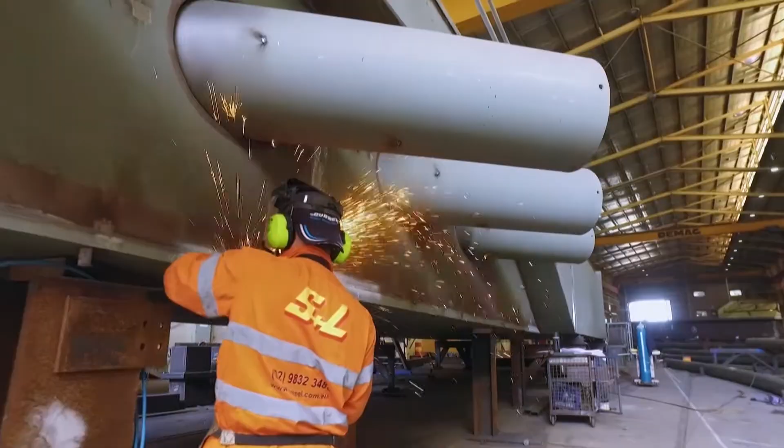In Sydney, Australia, an industrial army is called into action. No one has ever embarked on the scale of what we're doing here. Deep out of sight, beneath the harbour city, a battle unfolds. There's constant problem solving. Every day there's new problems, there's new issues. Battalions of engineers pit giant machines against rock and mud

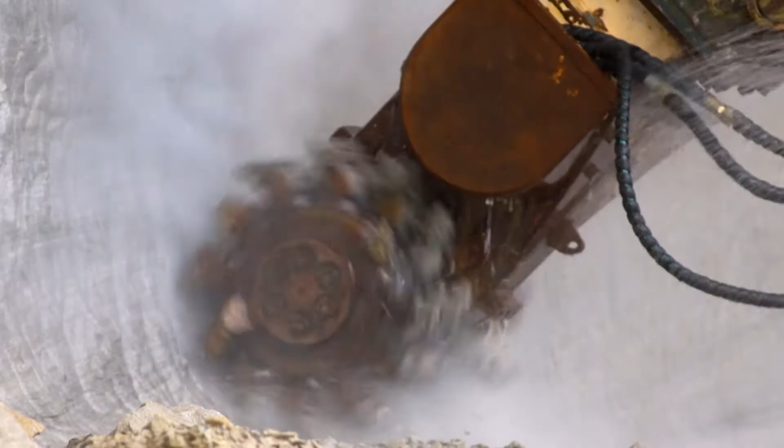to drive a new metro system through the beating heart of the city. We have to get there, there's no other way. The stakes are high and the clock is ticking. You've got to take every bit of luck you can get, don't you, in this game? This is by far and away the biggest public transport project in Australia's history.

If I'm honest, I probably didn't quite know what I was getting myself into. Got the problem?

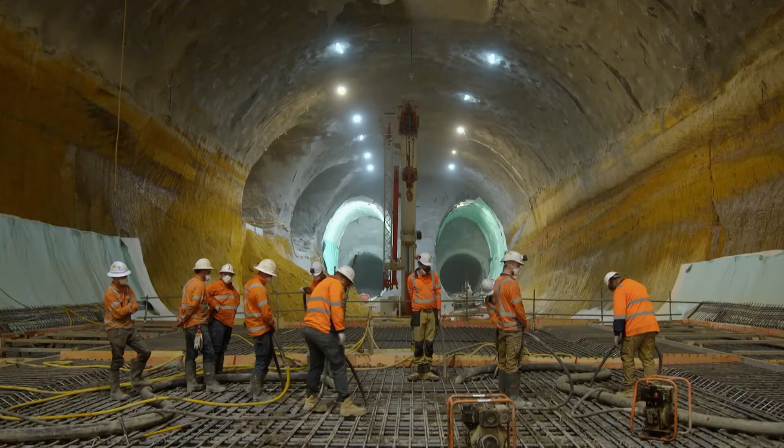Under the heart of Sydney, construction of the city's massive new metro forges ahead against the clock. 40,000 workers battle to create a $50 billion game changer to tackle the city's traffic nightmare. When it's complete, this new driverless railway will have dozens of new stations, more than 150 kilometres of track, and create a giant loop around Sydney.

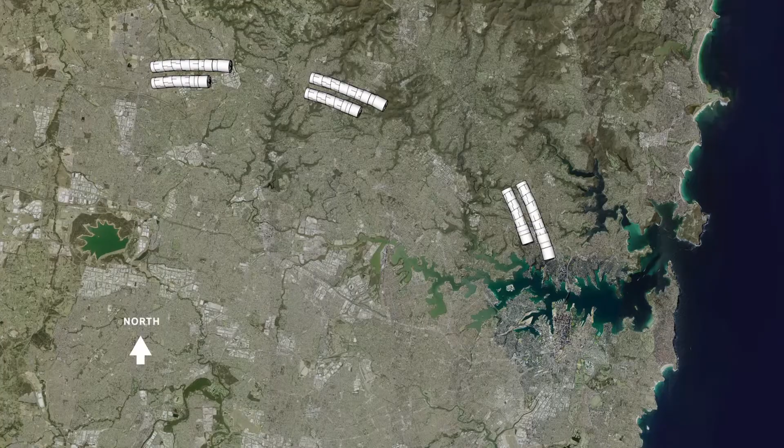8 monster hard rock tunnel boring machines, or TBMs, are digging more than 60 kilometres of tunnels beneath the city, beneath towering skyscrapers, and to the edge of one of the world's largest harbours. And now, the 9th tunnel boring machine, known as Kathleen, is about to embark on the most dangerous mission of them all, digging under Sydney Harbour.

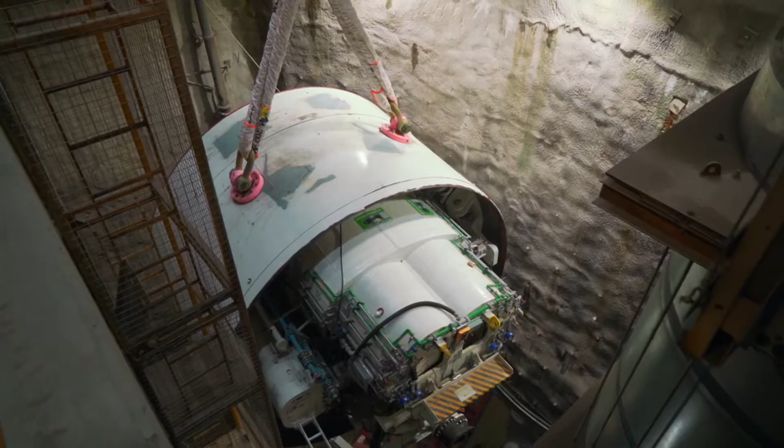At the Barangaroo site, months of planning have paid off. Kathleen's giant pieces have been transported halfway across the world, across the harbour, and across a busy road, carefully lowered down a shaft to be reassembled in her launching cavern 35 metres underground. Kathleen is now ready to go to work.

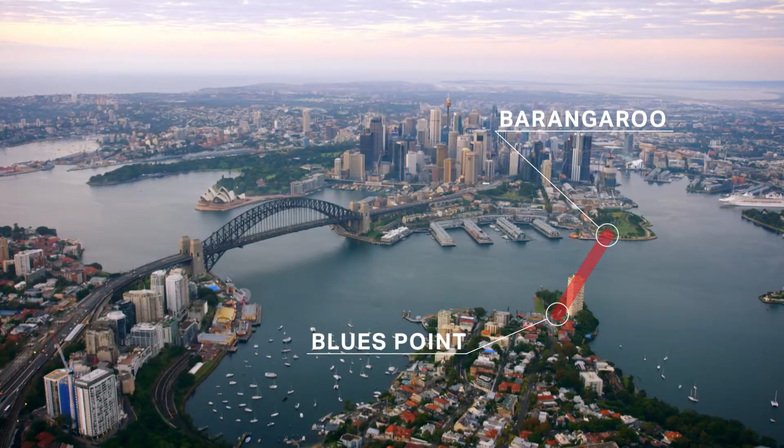Her mission? To bore an 884-metre-long tunnel deep beneath Sydney Harbour itself, twice. Not only will Kathleen's team be working almost 50 metres under the surface, they'll be operating in challenging geological conditions. Instead of friendly Sydney sandstone, they face soft mud and clay sediments, potentially shifting, unstable, and prone to collapse.

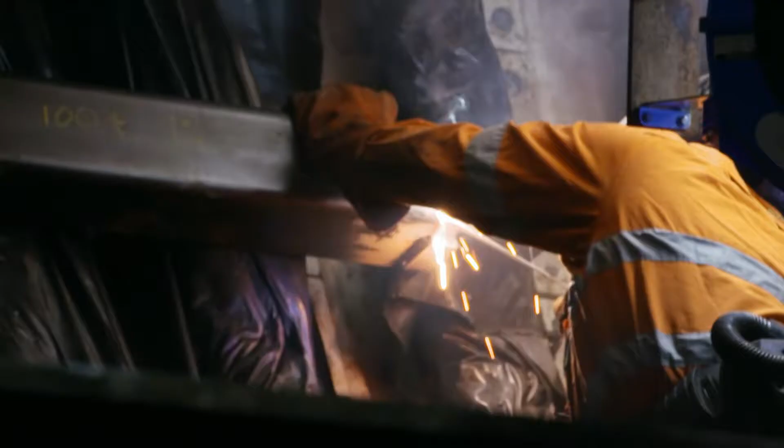Despite the dangers ahead, Kathleen's team is fired up. Her operators, Daniel Hill, known as Red Dog, and Adam Griffith, known as Griffo, are ready to go.

It's pretty much where the magic happens. Yep, we steer the ship from, so... Yeah, this is the business end. Yeah, steering wheel and your pressures off your screens, which you can see what you're doing. Might put more pressure on the bottom to go up than on the top, and more pressure on the left than the right to go right. And the panic button? There actually is a panic button. Right here, panic button. Yeah, that's when you're well and truly stuffed.

Red Dog jokes, but the refuge chamber is serious business. If something happens behind you on the machine, because you do not have an exit point, this is where we'll be ending up. The biggest thing is mainly a fire behind you. So this protects you, like the smoke, because if there's obviously smoke, you can't breathe, and you're in too far. Again, you can stay in here for 36 hours.

Kathleen has been specially designed for the bottom of Sydney Harbour and is known as a slurry TBM. Her front end is highly pressurised to stop mud and water from flooding in. Without it, the dig would be impossible. But working with high-pressure machinery deep underground is an extremely risky task.

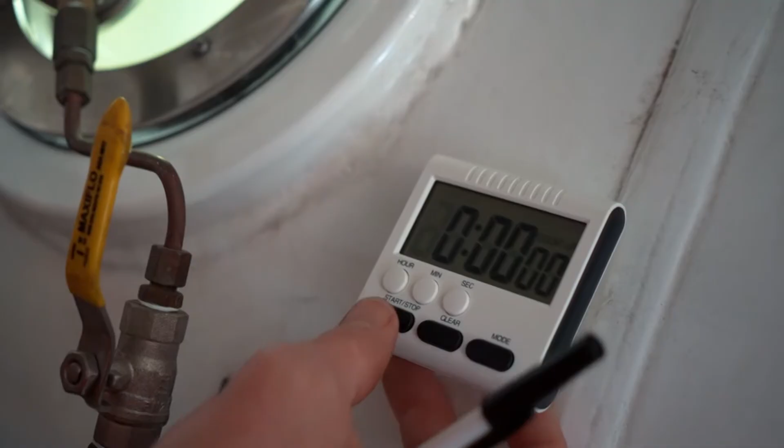Okay, I've got a thumbs up. We're about to start compression. Ready to go? Des Walters will carefully monitor the increase in pressure, or compression, to ensure Jamie and Vincent have time to equalize pressure in their ears. If they can't equalize as the pressure builds, their eardrums could burst.

Jamie is having problems - she has pain in her ears and sinuses. But they press on, and Jamie begins to get the hang of it. All good? Good, Jamie. That's the worst part over, mate.

20 metres. Once we get down to about 30 metres, we'll notice two things happen. The first is their voice will change, because the air is so much denser it doesn't resonate the vocal cords properly. You hear the laughter because they're just at 30 metres - they've just started to get the first signs of nitrogen narcosis, which is really just intoxication, the same as alcohol. She started right on the mark, right on 30 metres - she started to cackle. They're starting to feel pretty happy.

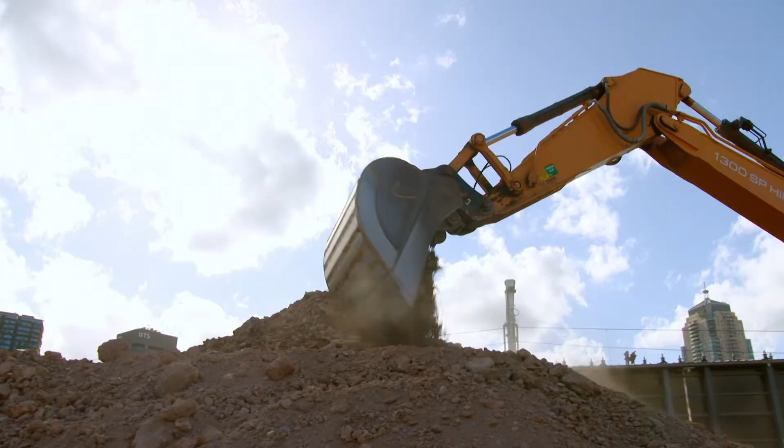Right in the middle of Australia's busiest rail hub, Central Station, Construction Director James Pearce and his team have started excavating the new metro station. But now they run into trouble - in the dead centre of their dig, they discover uncharted graves, some with human remains. So we've dug up some things, we've brought in a team of archaeologists, and we're now stopped in the area. Unfortunately we've got to quarantine it, hand it over to the archaeologists, and hopefully get it back pretty soon.

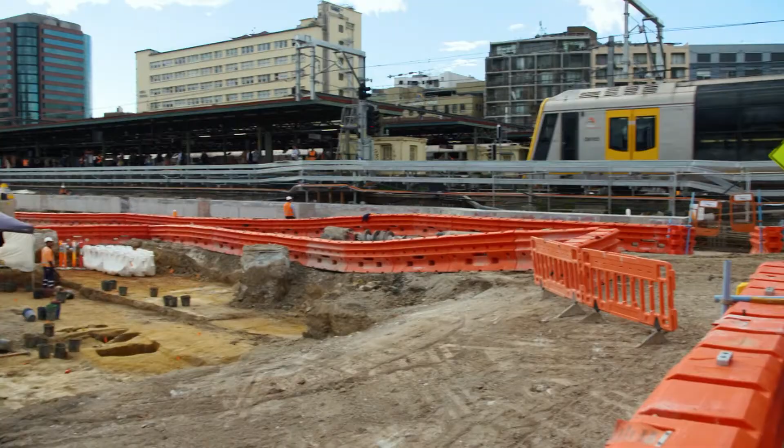Fingers crossed - it's a major setback. James stops nearly all work on this part of the site while archaeologist Ian Stewart and his team excavate the graves. We're acutely aware of the time pressures, and we're trying to do this as efficiently as we can, but obviously this has really delayed their project.

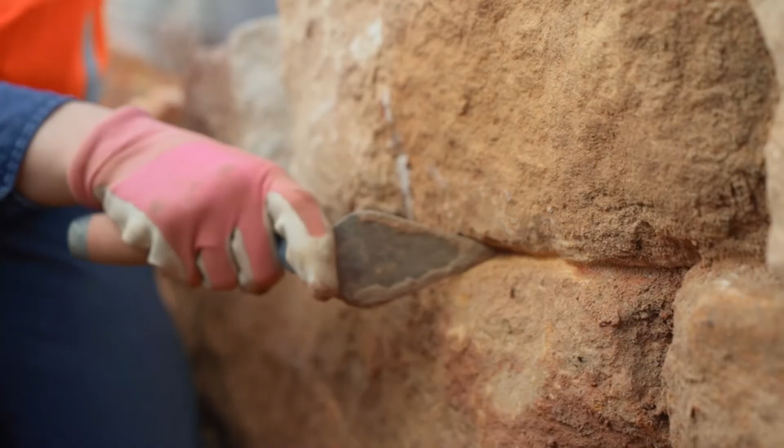Adele Zubritska and Natalia Hunt are sympathetic to James and his team, but until the graves are excavated and any bodies exhumed, archaeological trowels take precedence over the metro's shovels. We are excavating in a very old area of Sydney. Although a new railway network is very important, it's also important to record and respect our history. There might still be people in Sydney related to these people, so there's a real attachment, and it says a lot about Sydney's history.

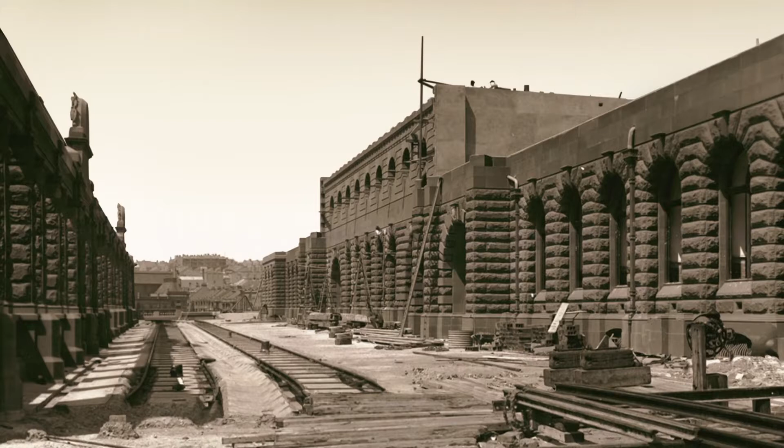The first railway station on this site was opened in 1855. Next door was a cemetery, consecrated in 1820. When construction of the new, much larger station began in 1901, the cemetery had to go.

Relatives were given 2 months to have their loved ones' remains removed. It was a ramshackle process. They didn't do a perfect job, let's put it like that, because if they did, we wouldn't be finding any bones at all. Some skeletons were crammed 10 to a coffin before being relocated to other cemeteries across Sydney. You can imagine that sometimes they might have grabbed only the largest bones that were visible, so we're here to collect what they left behind.

In all, about 30,000 graves were exhumed at the start of last century. Some of them may have been missed, some people might have gotten a little bit lazy, some people might have decided that taking half of the body was as good as taking the whole body. During the excavation...

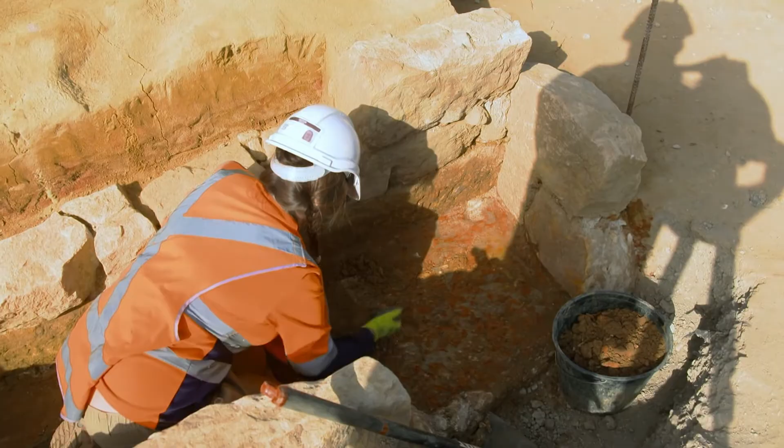160-year-old remains are unearthed. The grave is marked with a metal plaque: Joseph Thompson. Local historians track down Penny Russell, his great-great-great-granddaughter. Born in 1779, he died in 1858 in his 80th year. As they always kindly say, he didn't quite make it to 80.

Penny meets with the Sydney Metro team and members of a historical society. They need to decide what will now be done with the remains. I'm not too fussed in some ways about what happens to the bones, as long as they're treated with some suitable level of respect and care, and they're returned to the earth in something as close as possible to what his family would have wished at the time.

At Martin Place, senior project manager Will Freelander and his team are making far better progress. They've demolished 2 towers, but now obstacles buried beneath their feet are the next challenge. Not graves, but tunnels - a maze of tunnels. 2 existing railway lines that feed the eastern suburbs of Sydney, 2 new metro tunnels, and a pedestrian tunnel, all intersecting right beneath this planned 30-storey building.

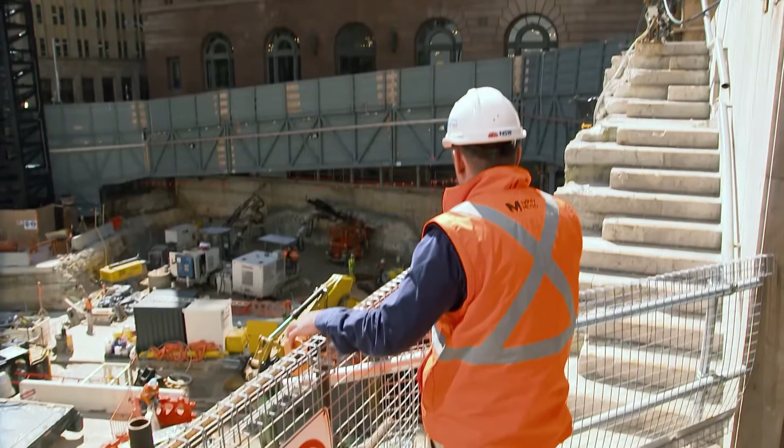It's Will's job to install huge foundation pillars to support the new tower, but there's precious little space to put them. It was a really difficult operation for the designers to come up with the location for these piles with the amount of things we're trying to dodge here, both our station that we're building and those eastern suburbs lines. So we come within 2 metres of the existing eastern suburbs rail lines, and we actually come within 500 mil of the tunnels that we're constructing at the moment down there.

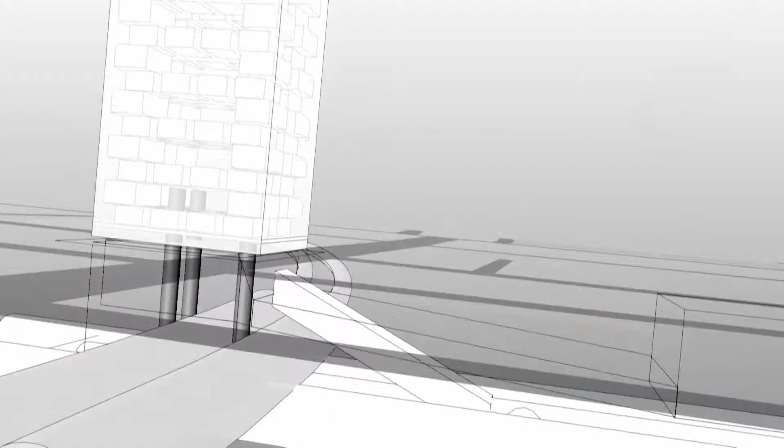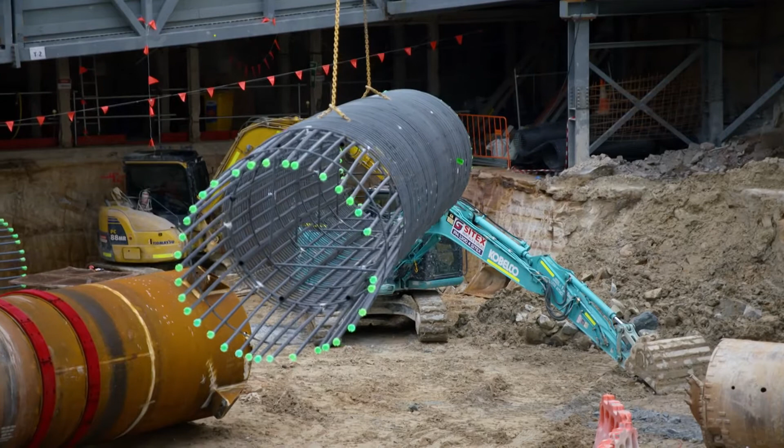But it's about to get even more risky. The pillars need to bear the weight of the new tower, but they can't put pressure on any of the tunnels below. So Will's team needs to construct specialised foundation pillars to support the building. You can see behind me one of the steel reinforcement cages being lifted for the deep foundations we're constructing here. So the cage there is one of several that will be installed in that single pile, in addition to the steel reinforcement. And then we have enormous steel plunge columns, which are solid steel members that are actually coming to site in their full length.

A super long and strong plunge column forms the spine of each massive pillar. Each column is lowered into enormous steel tubes bored into the ground. The plunge column will then be encased in reinforced steel and finally concrete. All the load from the building will go down into the base of those piles, rather than, as the building sees side load from wind, it won't be imposed on those rail tunnels that we're spanning over the top of.

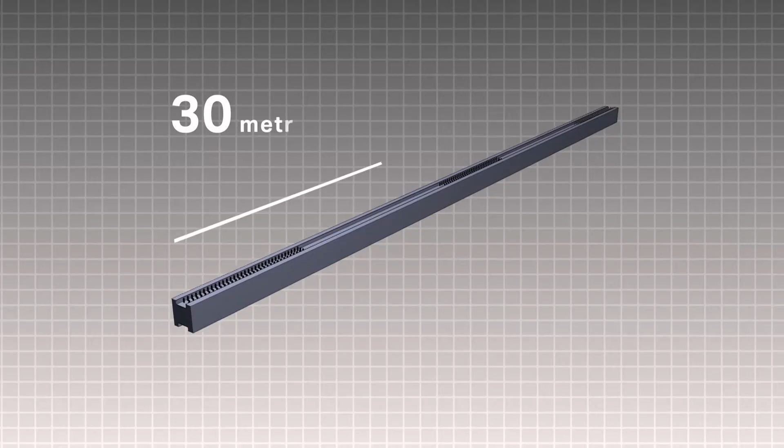Just getting the plunge columns onto the site right in the middle of central Sydney is a challenge, and one is arriving tonight. It's 30 metres long and weighs 56 tonnes. So Will has called in one of the most powerful cranes in Australia. That tower crane is basically the only piece of equipment able to lift those huge columns off the street, get them down into the site, and it'll be used to stand the column from the horizontal position, lift it vertically, and then lower it down into the excavation.

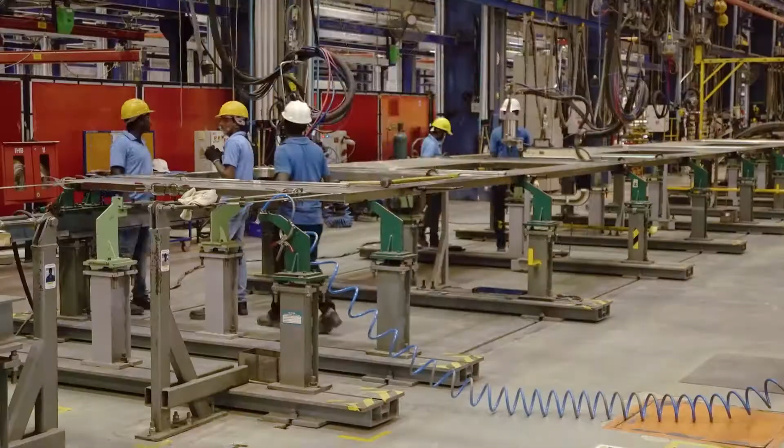It's full steam ahead for the construction and assembly of the new driverless metro trains. It's a tremendous opportunity for us to provide Sydney's first automated train. But Jim Morris knows the deadline is approaching fast, and there's a lot to do before these trains can get on the tracks. Sydney Metro is 22 train sets, with each train set having 6 carriages. You have 3 different types of carriages: the driving trailer car, a motor car with pantograph, and a motor car itself.

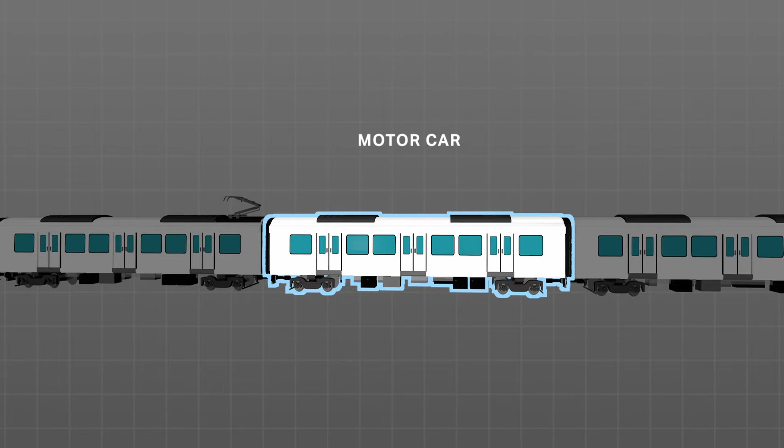550 people work in this factory, but they'll all need to keep up the pace to finish the 132 carriages in time. We have got a capacity now ramped up to 20 cars per month. So every 1.5 days, a car moves from one workstation to the other.

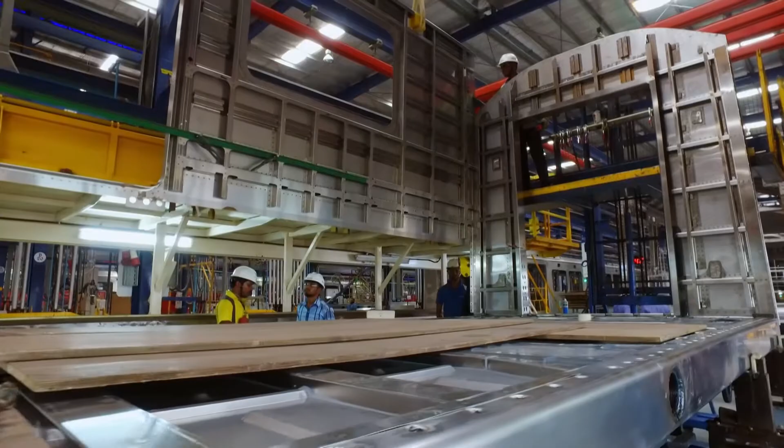The process begins with the car body shell construction. We receive individual piece parts which are welded together into sub-assemblies that form the underframe, the sidewall, the roof, the end walls, which is the car body.

The next step is the all-important high-pressure water test. We seal all the openings of the train to be able to test it and make sure it's watertight.

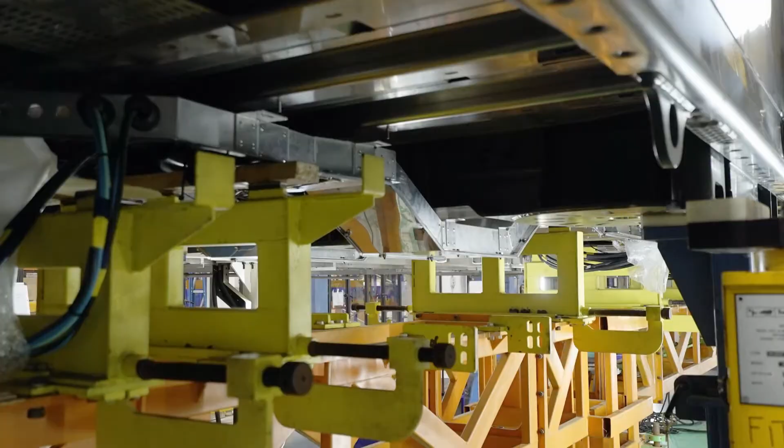Then we also do all the electrical installations, all the running of all the cabling, all the electrical equipment that's installed above and below the carriage itself.

It moves from station to station progressively, and once the car is completed, you have the integration of the car with the bogie. The bogie is basically the assembly of the bogie frame with the wheels, axles, and brake discs. Then it moves into testing to make sure we take the bugs out of the system before the trains are delivered to Sydney.

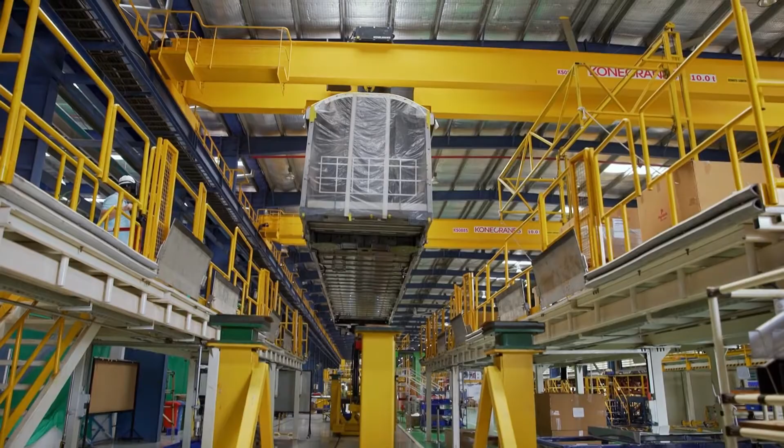With only a few months to go, the team now works in 3 shifts over 24 hours a day to make their deadline.

After midnight, with the roads almost empty, a giant steel column heads towards the city centre. The first 59 kilometres are easy enough. It's the last kilometre that worries Senior Project Manager Will Freelander.

It's heading here to Martin Place. This is one of the tighter corners we've got to navigate, so the beam's going to come off Bridge Street and up the street here before turning and going up towards site.

The delivery has only been approved if it doesn't come within a metre of any building. We try to allow a metre minimum clearance as we come around the corners. It's not much when you consider we may also have to navigate past parked cars. We plan on not touching any building or structure as we come in.

The first corner is a tight left. The chains holding the beam in place tighten under the strain. You can see the axles on the back of the rig steering independent to the main truck, with the operator in the back car controlling things.

One corner down, two to go. The next is another left turn, but even tighter. We've done the first side corner, just coming around one of the tightest ones now. Good to see no parked cars or extra issues we're dealing with tonight.

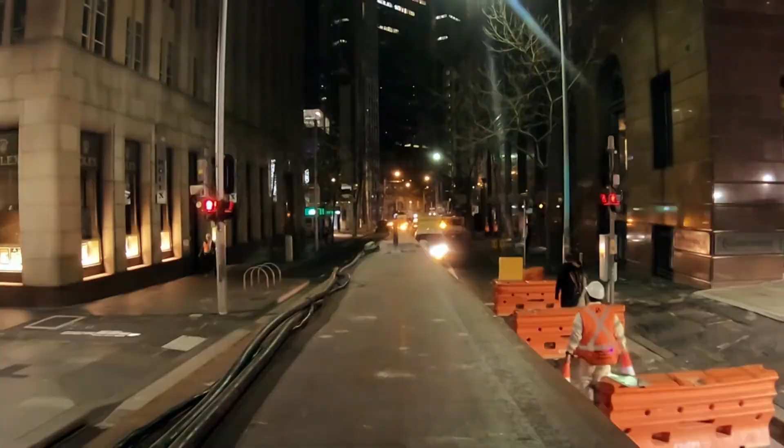The men behind the wheel are happy. Frank drove the front of the truck. Didn't get a red light down Parramatta Road. I've never done that in my life. How good's that, eh? Fergus, in the back, says: Yeah, all happy. Got here in one piece.

Ready to lift when you guys are.

Will is relieved. Nothing hit, nothing damaged. So I am a happy man. It's now 2 a.m, so I've got a couple of hours sleep before the day shift starts again and we get to start planning for the next hurdle to overcome.

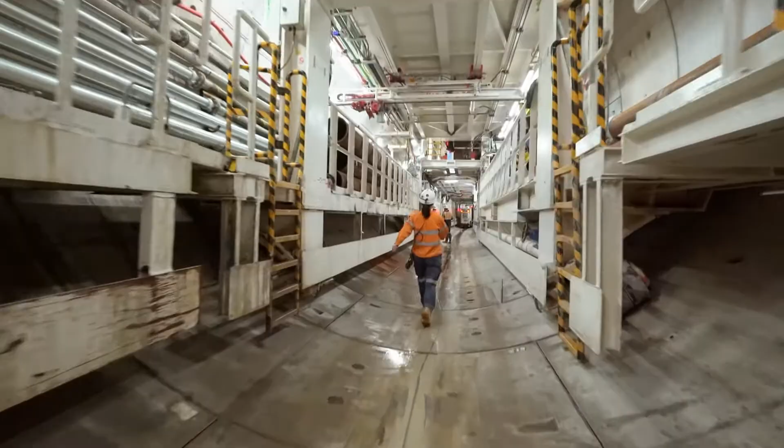First time TBM engineer Jamie Chirk is ready to take her place on the machine. She's not installing the concrete tunnel lining or operating the machine. Her job is to constantly check the tunnel is being built according to the design.

I have no experience with the TBM so far, and because this is all so new, I like to think I'll make sure I do all the right things and I'm not the reason for them to stop.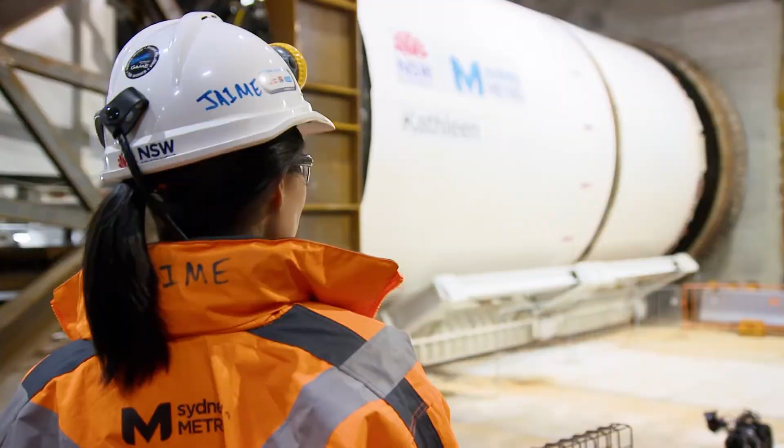She's going to be very unfamiliar with what parts move and what don't, and she'd have to be told quite clearly where she can and cannot be at certain times and whatnot. But she's a smart cookie, so she'll work it out.

There's certainly one place no one can be once the machine starts boring, and that's between the rock face and the cutter head. Red Dog does one final inspection before the pressure begins.

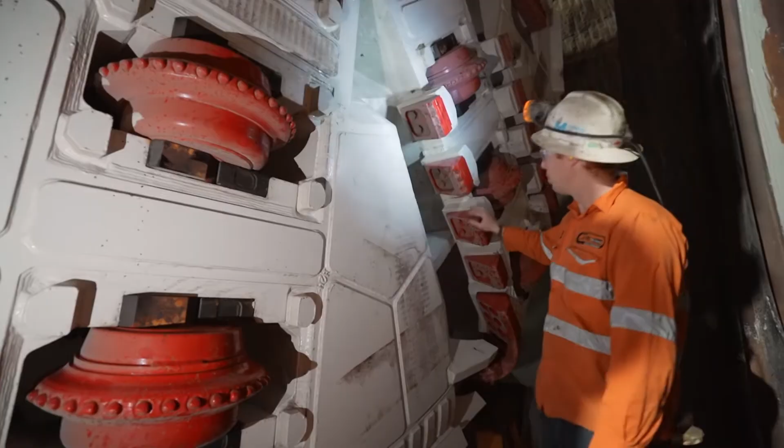To begin with, we've got solid sandstone, so these come in handy, but once we get into the softer stuff, we've got mainly all the buckets and the teeth. If we've got to come in here and change them, that's where we match the same pressure for the cutter head as it is for the water pressure coming into the machine.

When they're tunnelling deep under the ground, safety is always first, but the work they're doing requires some of the best skills needed around the world to actually bring these projects to fruition.

Kathleen is fired up. Into history she heads, deep beneath Sydney Harbour.

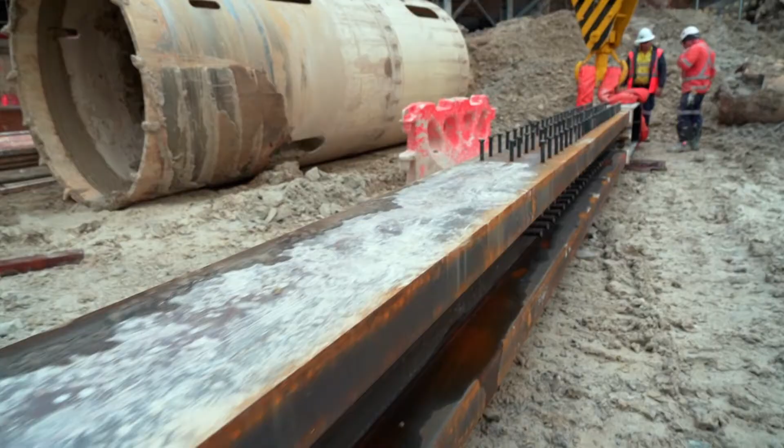Back at Martin Place, it's time for the new tower's foundation plunge columns to be installed. It's like threading the eye of a needle, where the needle is 30 metres long.

One of Australia's most powerful cranes has been brought in. Months of intense planning have gone into this operation, led by Site Superintendent Brian Marshall, who lifts the lid on the challenge ahead.

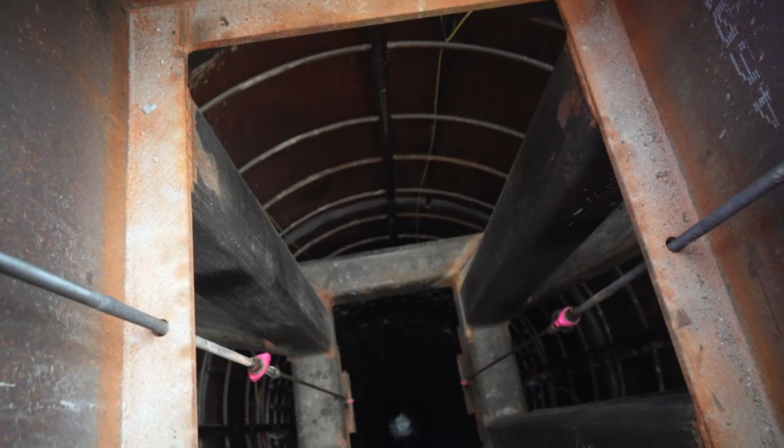Looking just inside the pile itself, we have a steel tube that runs on the outside that goes 27 metres deep. That then has a steel cage inside that protrudes out the bottom of that casing, taking the pile itself down to 40 metres deep. This is 18 months in the planning to actually get these beams in, installed and concreted in.

Brian is feeling the squeeze. Below, the new metro tunnels are being dug. One tunnelling machine is just metres from where the plunge column will end up.

The road header is cutting through here at the moment. It's cutting past this pile now, about a metre away from where we're standing, directly below us by 16 metres down. Normally you wouldn't go that close - you want to stay as far away from the piles of a building, especially a high-rise building, as you can.

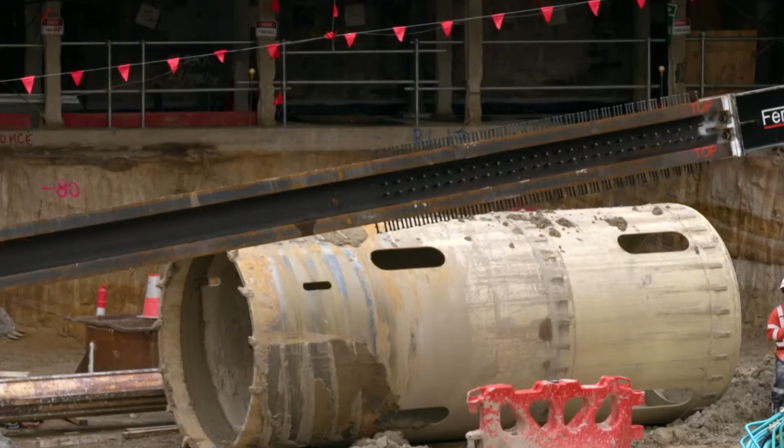So we're just about to lift the plunge column upright and then place it into the hole. The first plunge column is raised, taking great care that the 30 metres of steel doesn't begin to rotate or swing. The beam is designed to be lifted in this direction - if we lift it out of the right direction, it could actually put a bend in the beam, which we don't want.

Brian is on tenterhooks. It should take around 15 minutes for the beam to be lifted up and placed into position in the subframe that holds it up there. So far, so good.

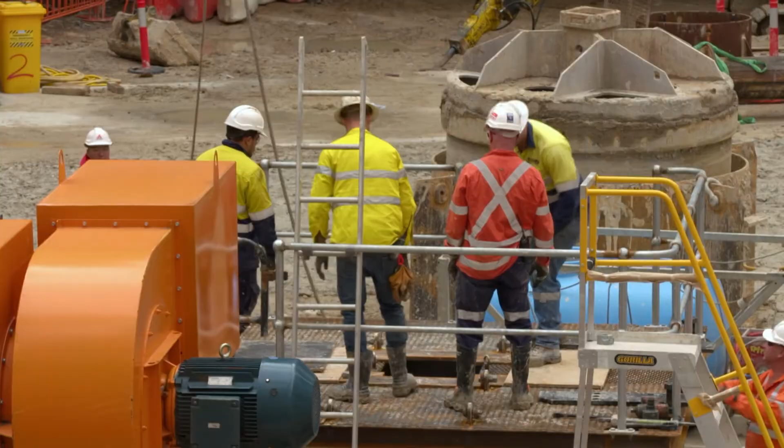Next, before the column descends into its hole, every last bit of dirt and grime must be removed. The concrete must later set around it perfectly snug, like a second skin. Corrosion would be catastrophic.

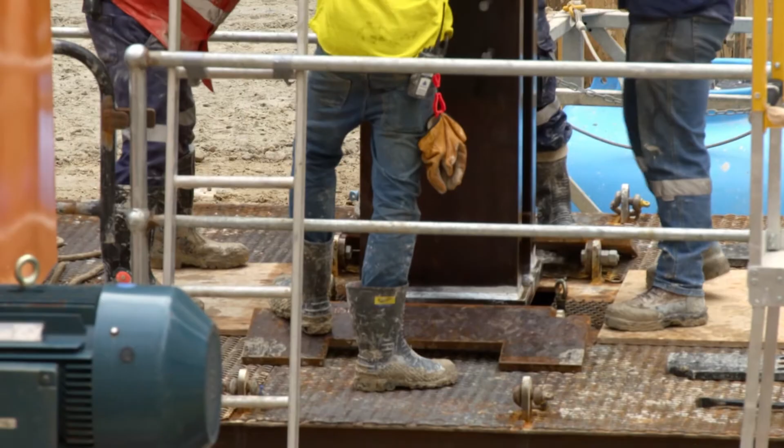Time to thread the needle. The first few metres are critical - everything must be perfectly aligned. Any twisting or buckling, and it's back to the drawing board.

The plunge column drops into place, narrowly avoiding the maze of tunnels below. Now they're putting in the locking pins that actually locate the beam in the right position. We don't want it to be off plumb at all, because if it's out by 20 millimetres at this point, if you go up 30 stories, that would be magnified into around half a metre off at the top.

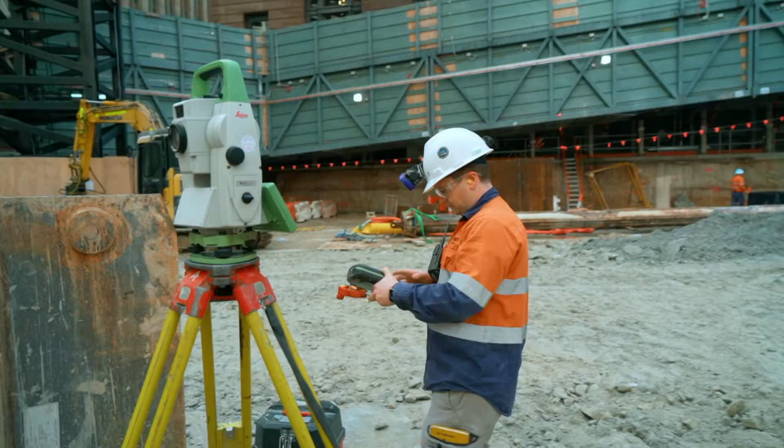Some final adjustments, and it's there. Touchdown. It's in location. Now all we need is a surveyor to come and tell us that it's in the exact location that we need.

The surveyor gives the plunge column the all clear. Great job in getting it in there. Now we're going to lock it off into position and prep it for the concrete works. Job well done by the boys.

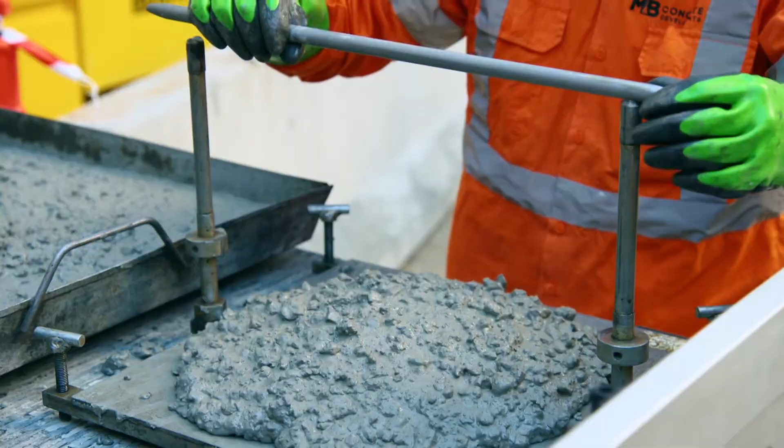But Brian is not finished yet. The concrete works first needs to pass the slump test. A set amount of concrete is dropped, and the amount of slump or spread is measured. This checks that the concrete is exactly the right viscosity to fill the entire hole, with no air gaps that could weaken the foundation.

The concrete gets the thumbs up and is poured down into the hole to secure the plunge column in place. When the concrete is set, it's tested again.

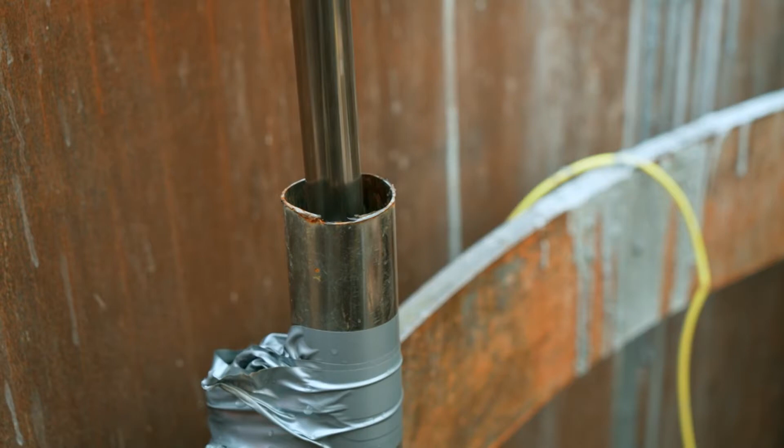There's a probe in this tube here and a probe in the other one over there. What it does is send a signal from that probe to this probe. If it's good consistent concrete, the signal should take a certain amount of time to get from one to the other. The little yellow one measures the temperature of the concrete, so we can see what temperature it reaches over the 7 days between being poured and when we do the sonic logging testing.

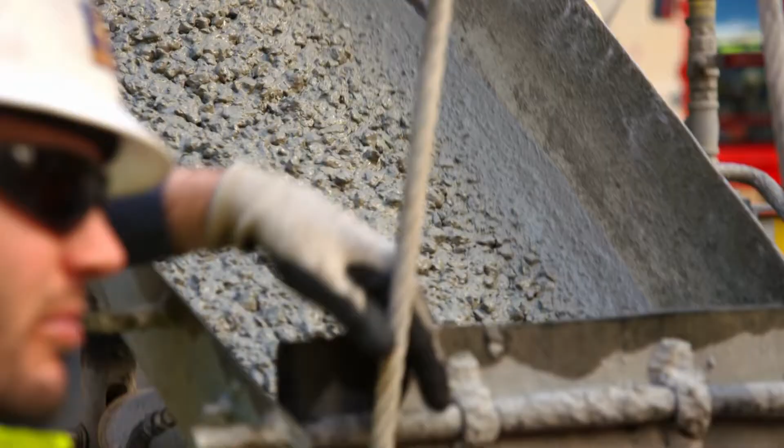What happens if the concrete fails the sonic logging test? That's not going to happen. You'd have to redesign the building just to reposition one of these piles. The problem is there were only 3 locations we could put these piles in that wouldn't hit the existing or new rail tunnels we're putting in.

Luckily, the concrete passes the test, and the excavation of the massive Martin Place southern shaft goes full speed ahead.

Out in Sydney's northwest, almost all of the new metro line will run underground in twin 15-kilometre tunnels. But one section won't. West of Bella Vista, 4 kilometres of track needs to cross a floodplain. So engineers have decided the line will run above the ground, 13 metres above, along a viaduct.

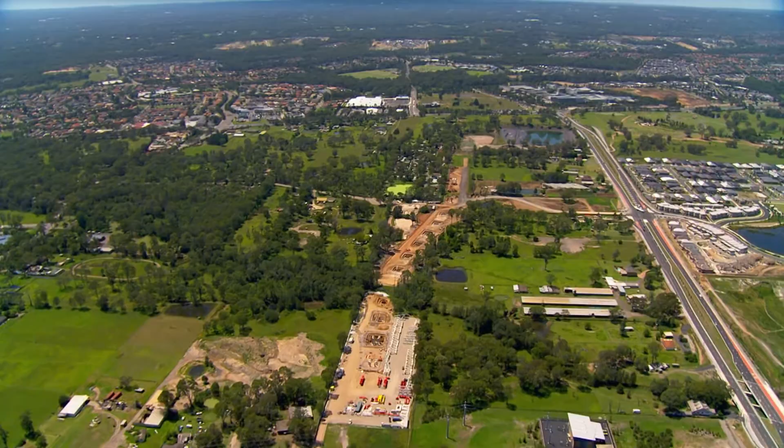This means 2 new stations will also need to be elevated. This part of the project is called SkyTrain, and most of it will be built by 2 horizontal cranes, known as launching gantries. The machines have just arrived from a massive roads project in Dubai.

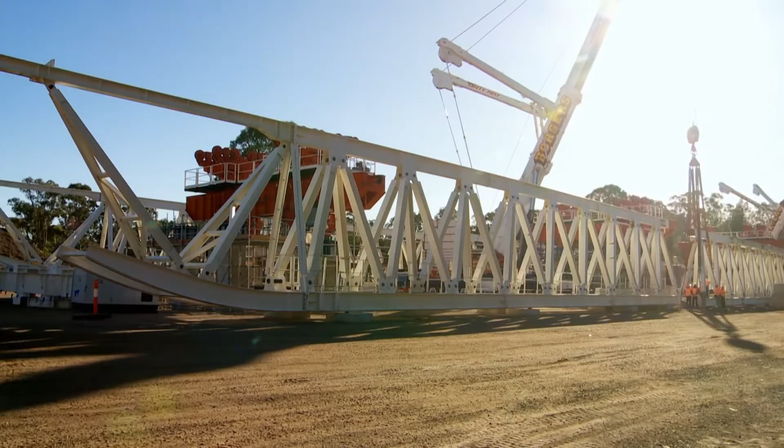There are several different types of challenges. We must be always ahead of the game, working at height, so safety has to be controlled in a very strict manner. First, the cranes have to be assembled about 20 meters above the ground, balanced on top of some of the 120 concrete piers they will move along to build the SkyTrain's deck.

We actually put up that piece and the other end piece at the same time. We are going to use 2 500-ton cranes that will work in tandem, and they will support the operation of setting the truss on the rails.

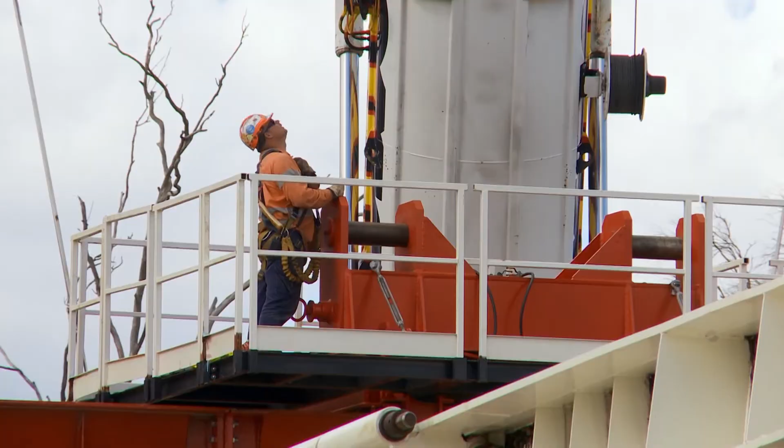Giuseppe Mafrica is responsible for this task, and he's not happy. The wind is his enemy, and it's starting to blow. One of the main factors that can affect the job is the wind. If there's too strong a wind, of course, we cannot erect. Normally, we stop if the wind is stronger than a certain limit.

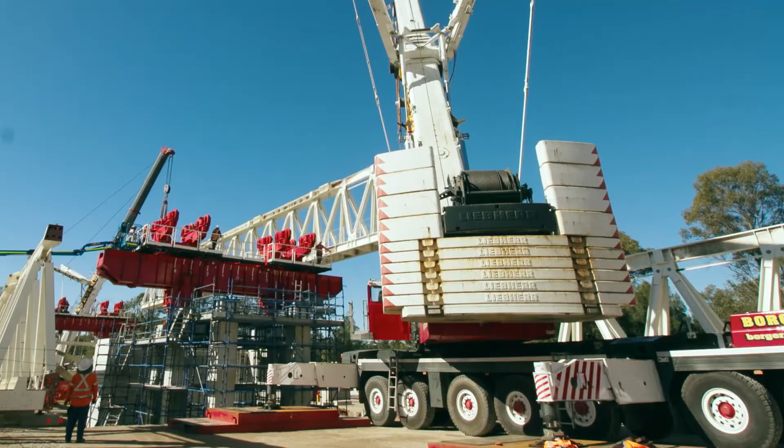For the moment, wind speed is just under the limit, and the lift gets underway. The first attempt to land one of the 6 giant trusses on top of the wheels fails. The wind is a real problem. They try again. This time, the wind drops just in time.

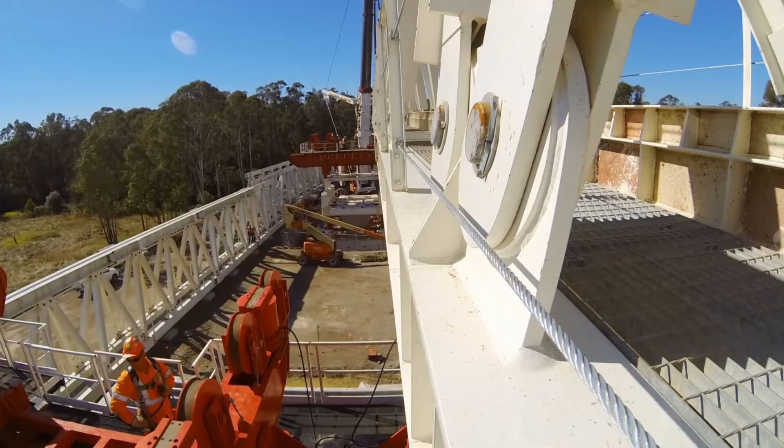And it's there. 1 down, 5 trusses to go. It gets easier. Soon, the major part of the lift is done. The remarkable thing about the gantries is their speed.

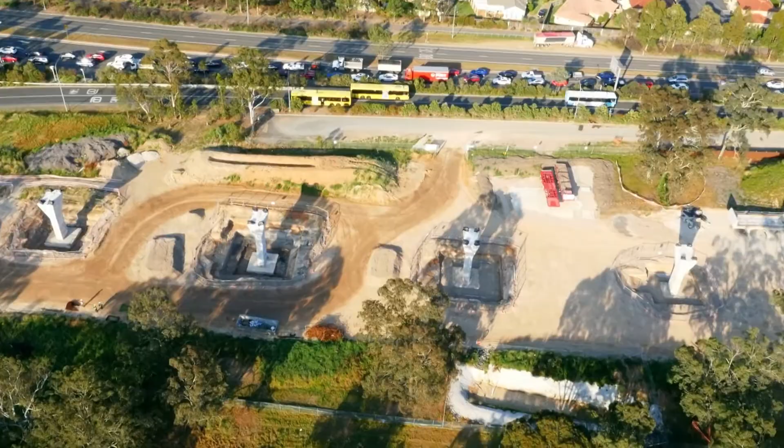Already, many of the concrete piers that will support the viaduct's deck have been installed. Temporary wheels on top of the piers will allow the crane to slide from pier to pier, using them like giant stepping stones as it moves forward.

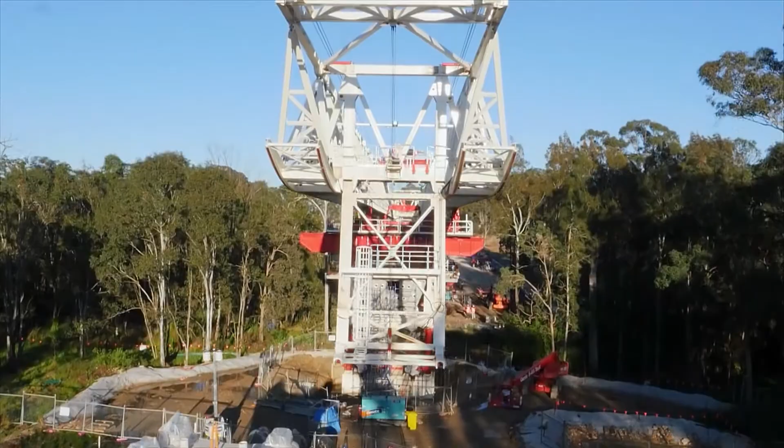It begins here, where the viaduct just starts to leave the ground. A precast segment is delivered. It weighs 90 tons. It's hoisted up by the gantry crane with ease. It's shifted over into position and slotted down securely on a temporary steel frame to hold it firmly in place.

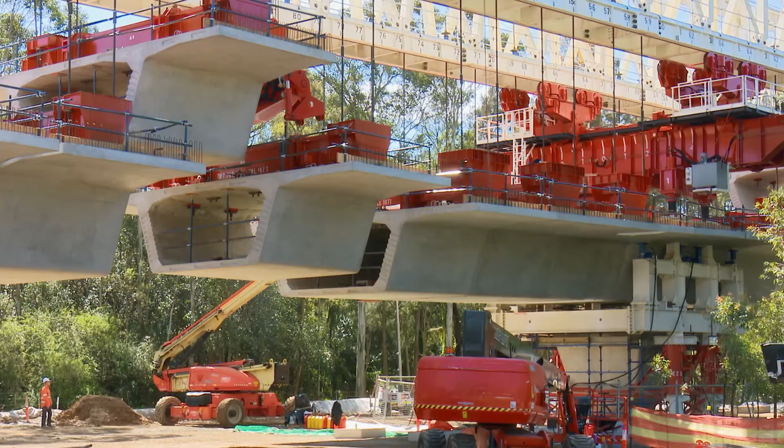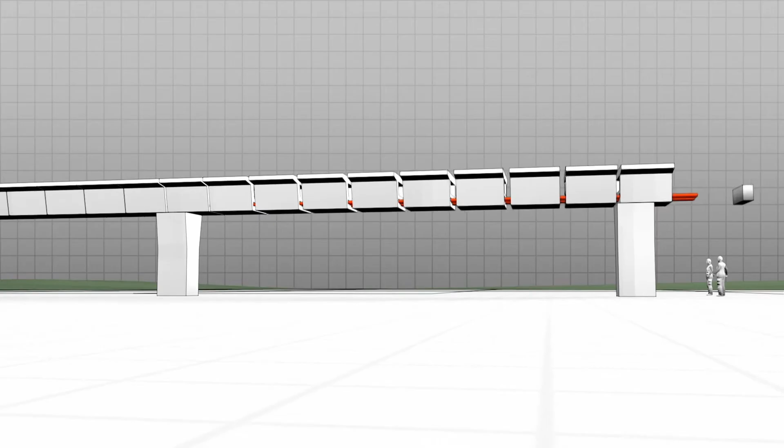One by one, the crane hoists up more segments until it's suspending 10 of them, a combined weight of almost 1,000 tons. Now comes the most critical part of the process: pulling all the segments tightly together. Steel cables are threaded through the segments, which are then tensioned tightly together, creating a concrete span as strong as if it had been poured as one piece.

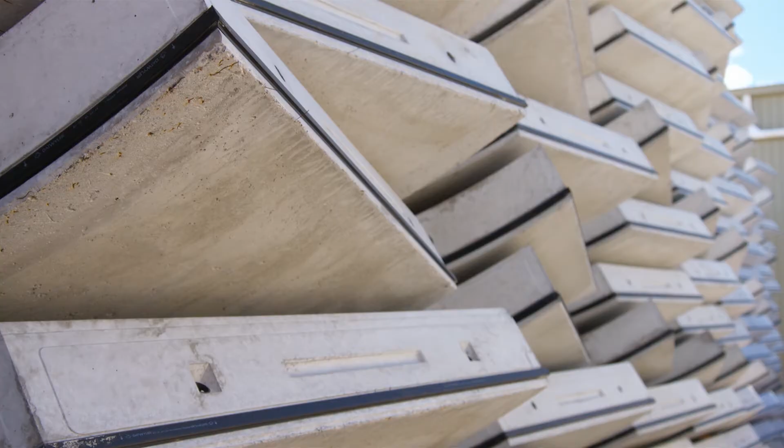Once they've launched, tunnel boring machines, or TBMs as they're known, require many thousands of concrete segments to build new metro tunnels. Each TBM needs up to 1,100 of these crescent-like pieces of concrete every week, so they can keep moving forward. To keep them fed, more than 140 people in vast concrete segment factories work around the clock to produce a segment every 6 minutes.

The largest factory is at a tunnelling site in the suburb of Marrickville, where nearly 100,000 segments will need to be made. Each weighs up to 4 tons and is designed to last at least 100 years. So high tensile steel wires and polyfibre are added into the concrete mix for extra strength.

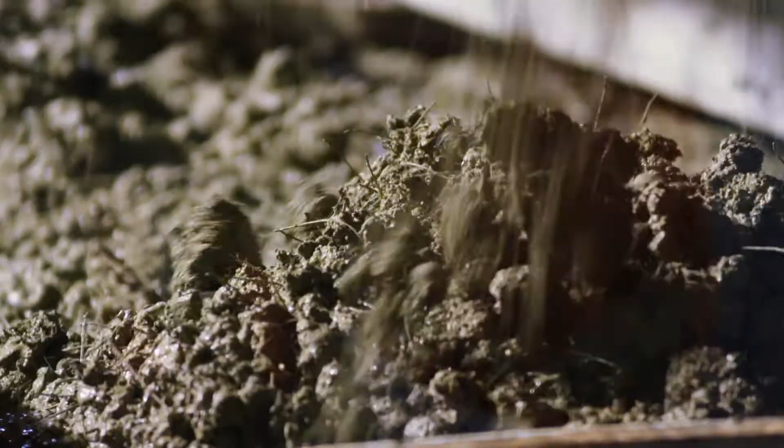Every segment has a unique barcode that tells us what type of segment it is and when it was manufactured, and that's scanned both over in the precast yard and then here, and then also on the TBM.

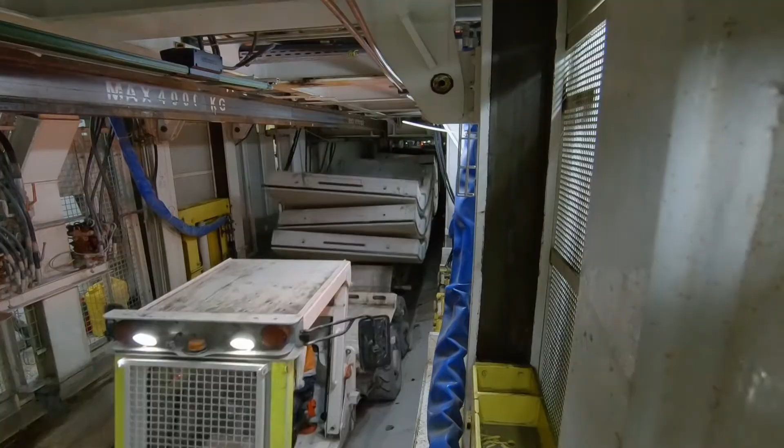Because the segments have to fit precisely, it is critical they're delivered in the correct order. Get it wrong, and the TBM grinds to a halt while the correct pieces are found and delivered underground. We have a guidance system which tells us the exact placement and the angle that the segments must be placed so that we can guide the TBM.

Each concrete ring is created by assembling 6 segments, but they are not symmetrical. Every ring is tapered, with one edge slightly shorter than the other. When the tunnel needs to run straight, the tapers alternate. But if the tunnel needs to turn, one tapered edge meets another. Aligning the tapered edges turns the tunnels.

It's important that we keep track of every segment that goes into the tunnel to ensure that the correct segment has been installed in the correct place. So we'll load this TSB.

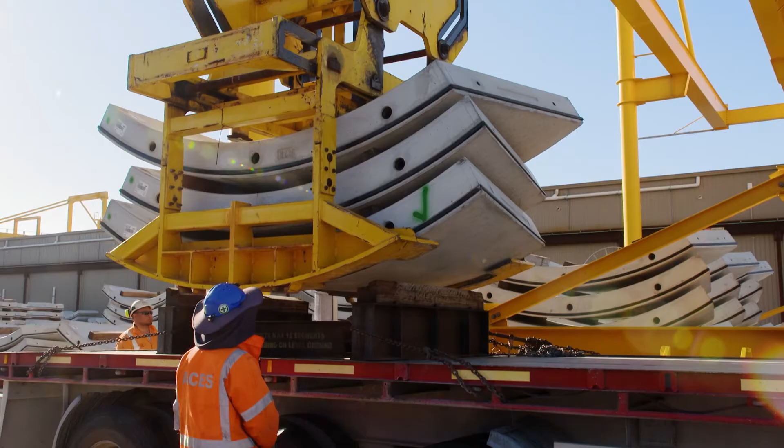Not all of these segments are destined for the tunnels at Marrickville. Six at a time are loaded onto trucks and transported to other tunnel boring machine sites around Sydney. This delivery is on its way to Chatswood on the North Shore, crossing the famous Sydney Harbour Bridge, where the segments are offloaded by a crane and successfully lowered into the site.

Back at Barangaroo, the TBM Kathleen crew have been making steady progress, digging deep below the harbour. 240 metres in, 140 rings. Yeah, go along nice and smooth, making good progress. Yeah, everything's tickety-boo at the moment.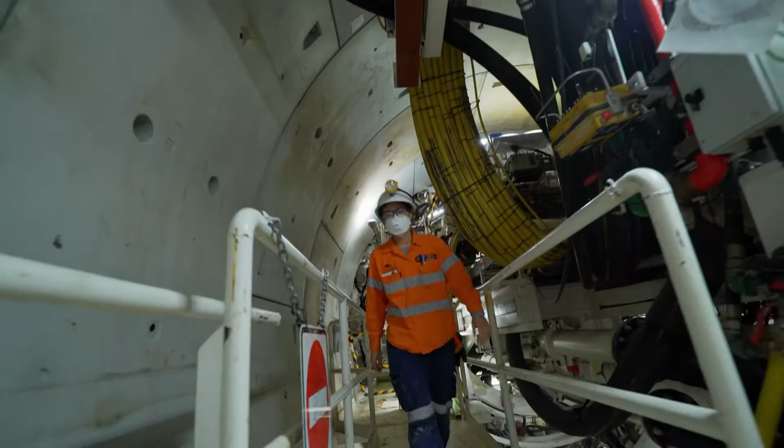Engineer Jamie Chirk, on her first TBM, has left behind any nervousness at Barangaroo. I'm quite busy actually in a shift. If I could clone myself, I'd be in 10 places at the one time. Yeah, we've been doing really well, and actually our managers were telling us how surprised everything's gone really smoothly, so very happy with that.

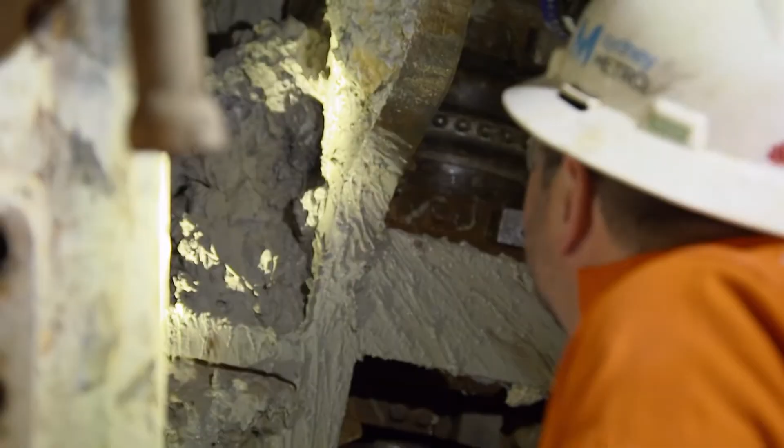But suddenly, they have to stop boring. They've hit a layer of dense clay, which is clogging up the cutter head. Thankfully, there's no water. This means they can still enter the front chambers to clear the cutters. It's fine, I'll just take it. We'll sort it out, we'll get the bentonite mixture right, we'll only get better from here.

Bentonite is what makes Kathleen different from the other tunnel boring machines. It's why this type of TBM is called a slurry machine. When the hatches are closed, the front of the TBM is pressurized, pumped full of liquid bentonite and high-pressure air. It pushes against the pressure of the mud and clay and stops it from flooding into the machine.

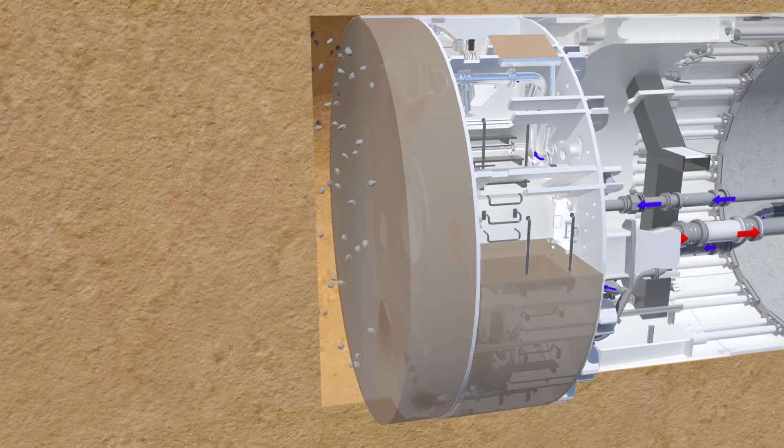The bentonite creates a slurry as it mixes with the material being excavated by the cutter head. The slurry is pumped out of the excavation chambers and travels along an ever longer pipe to reach the slurry treatment plant. Here, the excavated material, or spoil, is extracted from the slurry. The spoil is barged away. The bentonite is recycled. It's then pumped back to the TBM to be used again.

Through the sandstone and the clay, Kathleen has made great progress. But now, it's the moment of truth. The sandstone is behind her. Ahead lies the trickiest part of the harbour, the ancient river channel.

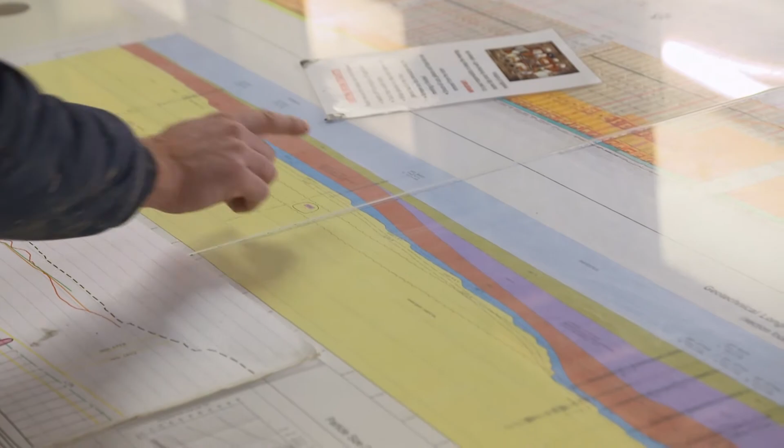So we've cut out of the sandstone, through the clays, and now we're in this band of organics, and it's 4.5 bar pressure, which is pretty high pressure. It's very, very soft, so you have to be very careful making sure the TBM is steering in the right direction. Because it is so soft, the machine has a tendency to sink. If you drop the pressure, the water would just race in at this point, absolutely race in. It's a bit of a critical time, it really is.

Non-negotiable today is be fit for duty, make sure you're not fatigued, and just be careful down there, and that's it. Have a safe one.

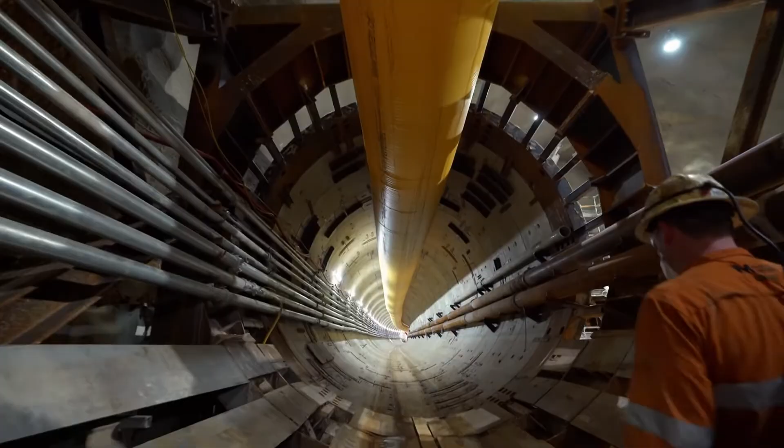Griffo only spends half of his shift on Kathleen. He splits his time between the TBM and the slurry treatment plant. I must walk 20 k's a day without any problem at all. So every day it's a little bit further when you're coming in.

At the plant, Griffo takes a look at just what they're boring through now they've left the sandstone behind. It's far less solid and far less stable. It's almost like soil, lots of seashells, lots of broken down plant matter. Chemistry is a little bit different, so it's a bit harder for this plant to deal with it.

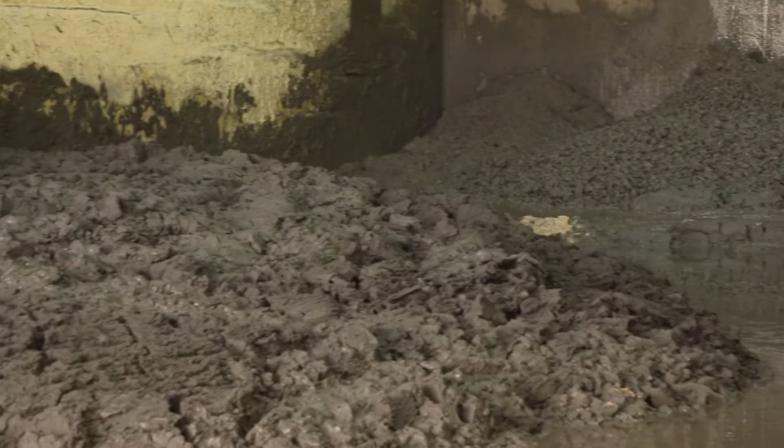Tunnel boring machine Kathleen is now mired in this sludge. It is ahead of them, behind them, beneath them, and above them, pressing down. It's an anxious time. Yeah, we're coming to almost a halfway point right under the middle. So we've got 5 bar head pressure in the bubble chamber. 5 bar is close to the maximum pressure for the best operation of the machine, pushing to the limit.

Red Dog says the high pressure chambers at the front are now too dangerous to enter. Because there's so much pressure on the head, we can't actually go in the front cutter head at the moment. Even under hyperbarics, it's a little bit too high. It's just changing that quickly, the material.

But suddenly, there may be no choice. Something has gone wrong up front inside the chamber. A piece of the giant cutter head has come loose.

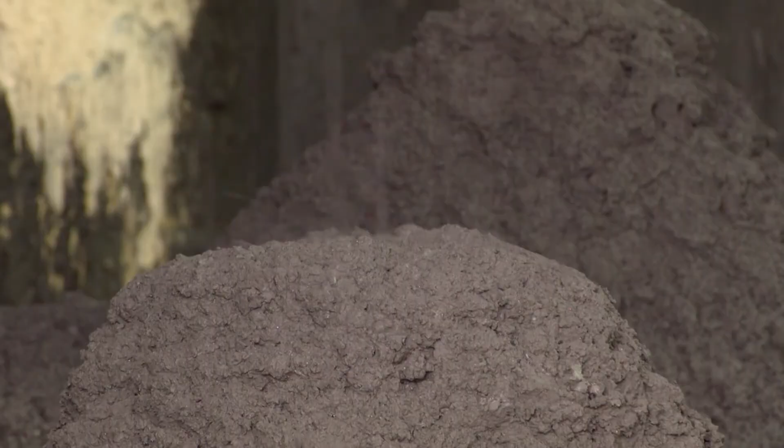It's shown up in the slurry treatment plant. Just making a joke to the guys, it's like, it's Friday the 13th, so let's see what happens. And literally, the foreman walks in and brings us this wedge and tells us it's what he just picked up from the slurry treatment plant.

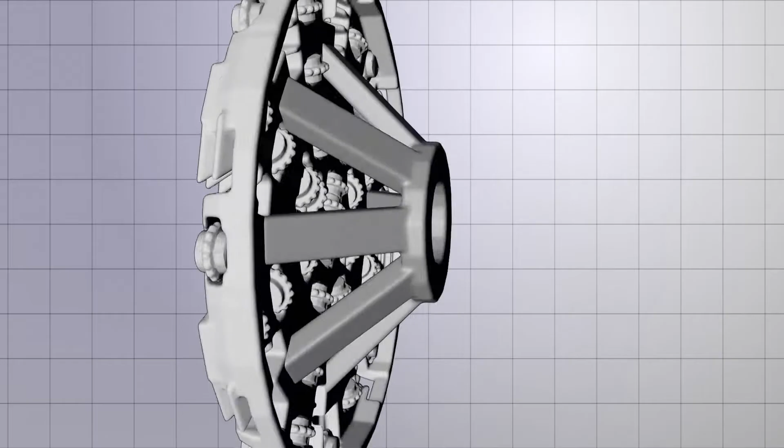We then made the decision to immediately stop the tunnel boring machine and to prepare for an intervention. The wedge secures the cutter wheels in place. It needs to be replaced, otherwise the cutter wheels risk coming loose and causing major damage. It's like a 400-kilo piece of steel that falls into the cutter head. It gets turned around with the cutter head, and it can create a fair amount of damage, destruction.

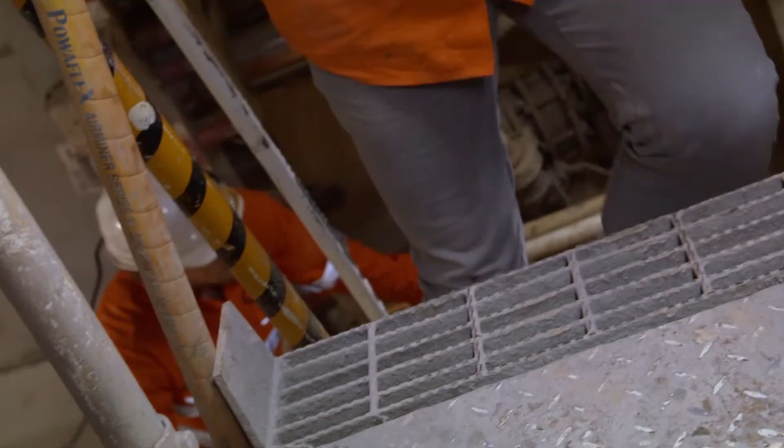They have less than 60 minutes to complete the job, or else they will have to spend hours in decompression to reduce the risk of the bends. Okay, here we go. It's 1404.

Vincent and Michele enter the hyperbaric chamber. They wait while the pressure is increased to match the pressure inside the cutter head. Once equalized, they get to work. Michele heads into the cutter head, his voice already affected by the pressure. Vincent remains in the bubble chamber. Michele brings a camera.

This is very rare footage. Few people have ever seen the inside of a cutter head while it's in the heart of the clay and mud. Michele starts checking the cutter wheels one by one. I need some water, mate. He's looking for the four double cutters.

This is good. The cutter head is more than 7 meters high, and everything is covered in sludge. 1, 2, 3, 4, okay. Vincent controls the flow of a hose from inside the adjoining chamber. Give me back the water. All right, good. Suddenly, Michele is hit by the water spray.

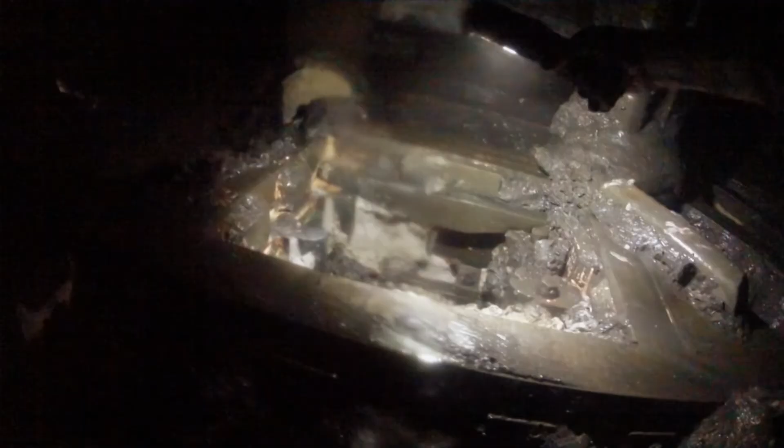Soon, they have only 12 minutes left. Michele and Vincent need to get to the decompression chamber soon. The problem is here, we have the wedges here. Yeah, I found it. It's number 5 and 7. 5 and 7 is missing here.

And there's more good news, the cutter is still here. The cutter wheel hasn't been damaged, just the wedge, the rest is okay. Mission accomplished. Okay, I'm coming up.

Another team will now enter through the second hyperbaric chamber to replace the missing wedge. And after almost 2 hours of decompression, Vincent and Michele are back. Vincent is a funny guy, and at some point he started spraying water on me while I was very concentrated finding the problem, but it's part of the job. We have this funny moment as well.

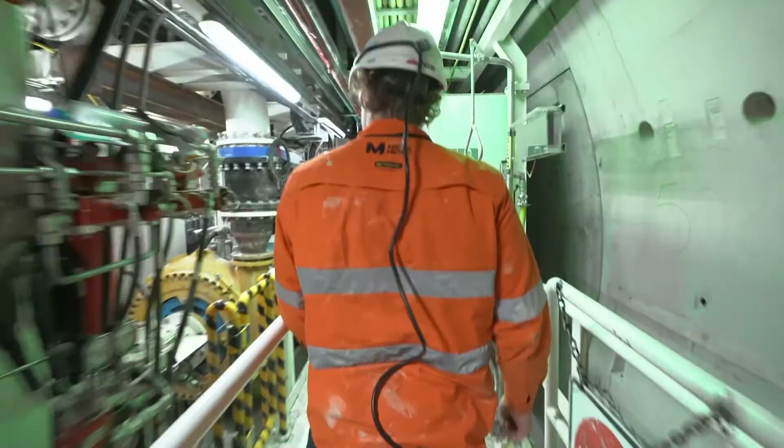Well done. Next time, as Kathleen continues to battle the mud, ominous signs appear that something has again gone wrong. Bubbles are not good, it means that something is going wrong. A part of the SkyTrain suddenly cracks. We are trying to understand what is going on. And teams race to complete the first line so the driverless trains can start running. We're going to move that out in the stabling road, that's ready to rock and roll for its movement testing.